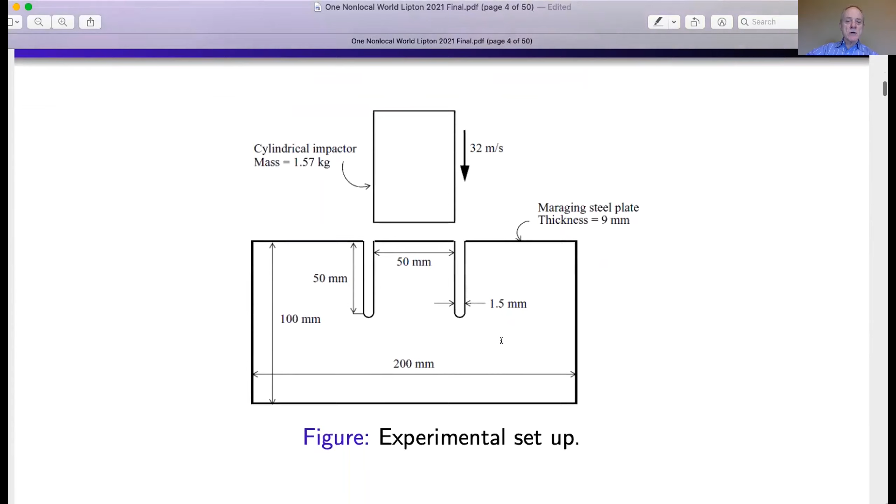Now I want to show you a numerical analysis which exhibits this. We're going to use a peridynamic model similar to the one given, with the force that we'll say is elastic, but if it gets too strong—if the strain between points X and Y gets too big—things may break. We're going to use that force and dynamics, fill a material with it, and impact it with a cylindrical impactor coming down at 32 meters per second.

It's going to hit a ligament, with air on both sides. Here we have zero displacement boundary conditions, fixing it; here it's zero traction, and here it's zero traction as well. We're going to impact this material, with forces and acceleration governed by an equation of this form. We'll see what happens.

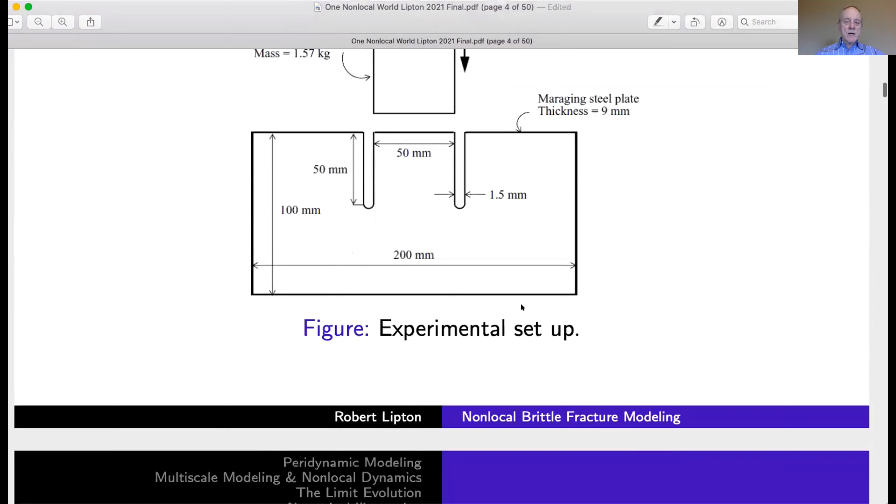What happens is the impactor strikes the sample. These are held displaced—fixed displacements, so they stay the same. But this thing shifts and cracks. These are intact here, intact here—this material is intact here, but we have a crack.

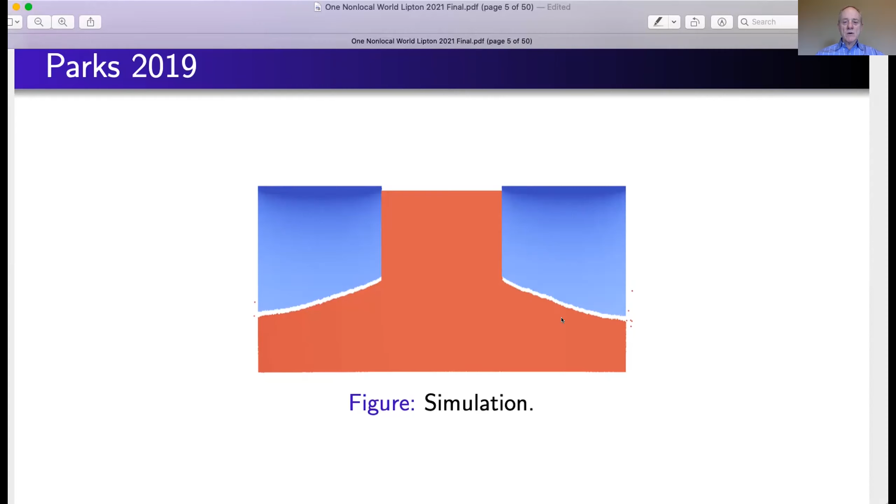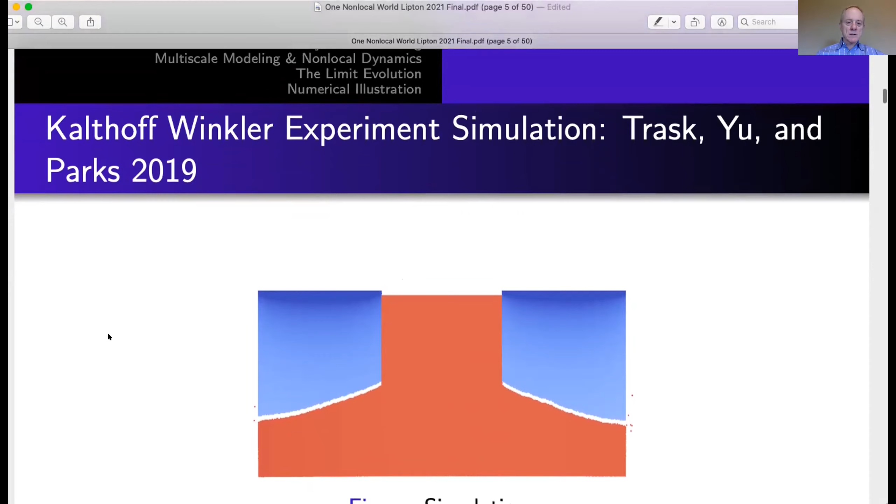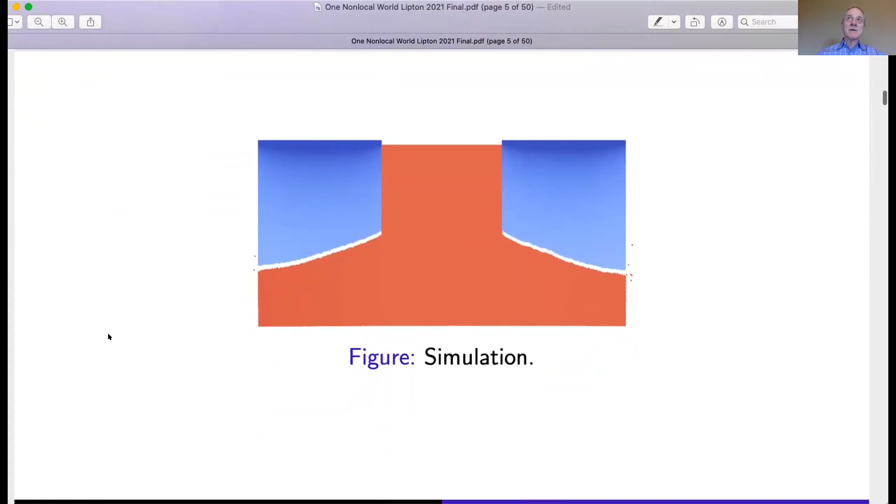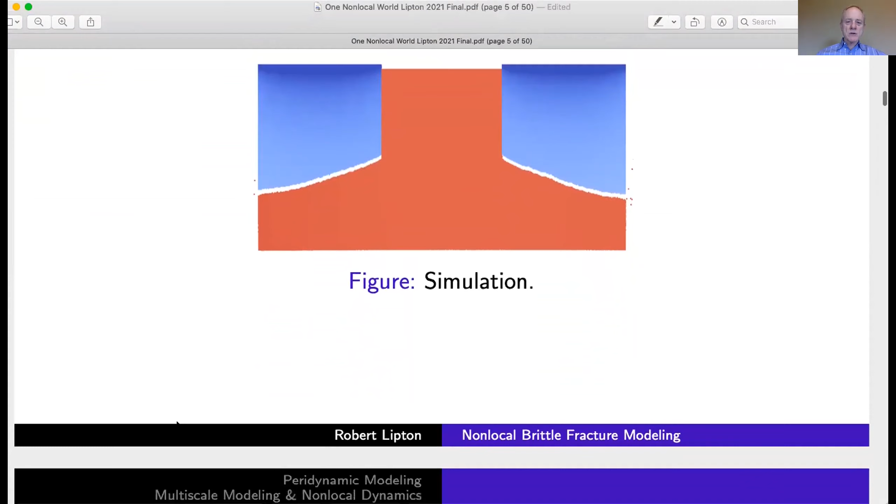This is a numerical simulation by Nathaniel Trask, Yu, and Michael Parks, in their 2019 article in Computer Methods in Applied Mechanics and Engineering. From that dynamics emerges this fracture, symmetric on both sides. What they find is that the angle the fracture makes with the vertical is 68 degrees, in agreement with experiment.

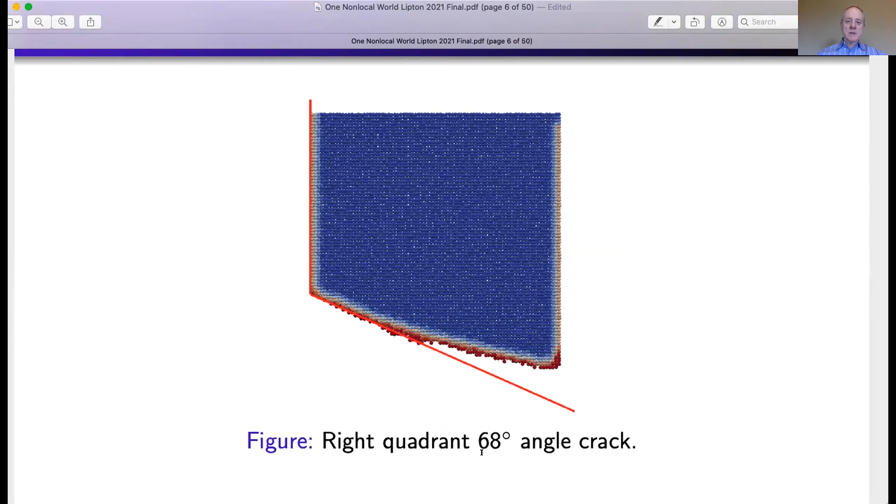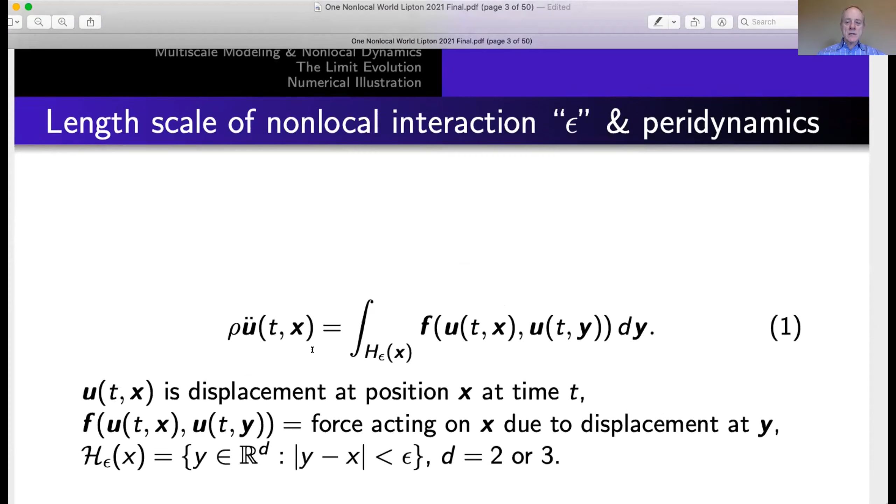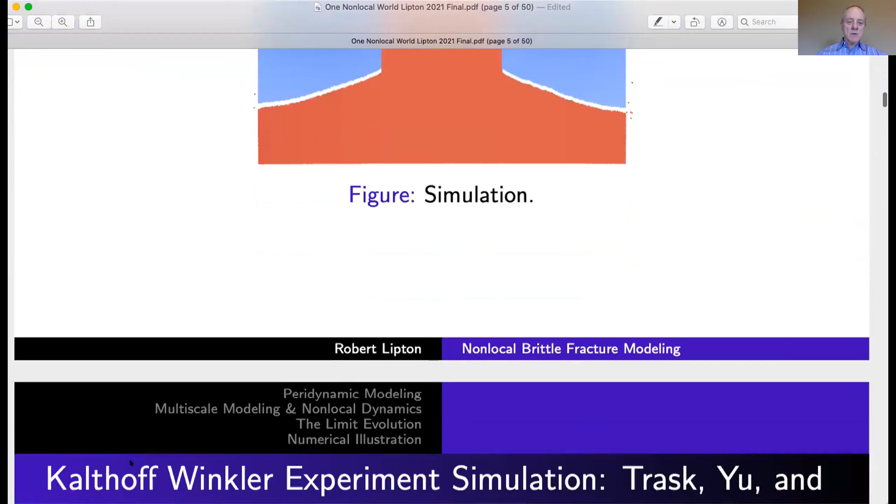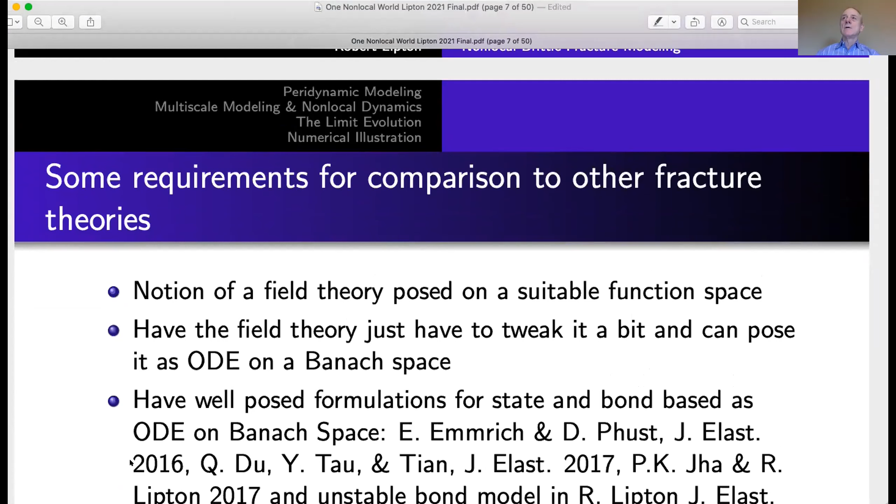Now, that is an emergent phenomenon because that 68-degree angle was not part of the dynamic formulation. It emerged from the model. And so that's what we mean by a field theory, and it's very compelling. So we have an emerging fracture emerging from a simulation. This is similar in spirit, at least, to Cucker-Smale and the emergence of flocking due to nearest neighbor interactions.

In this lecture, what we want to do is compare the peridynamic fracture model to other fracture models to see how they relate to each other. We're going to take the length scale, here it would be the horizon of interaction, and ask that the horizon becomes smaller and smaller. So we're going to look at the length scale of vanishing horizon and its effect on the dynamics.

And what we will do is write down the equations associated with that dynamics, and then using the equations alone and no hypotheses, we'll send the horizon to zero and see what the limit dynamics is. So that's the idea here.

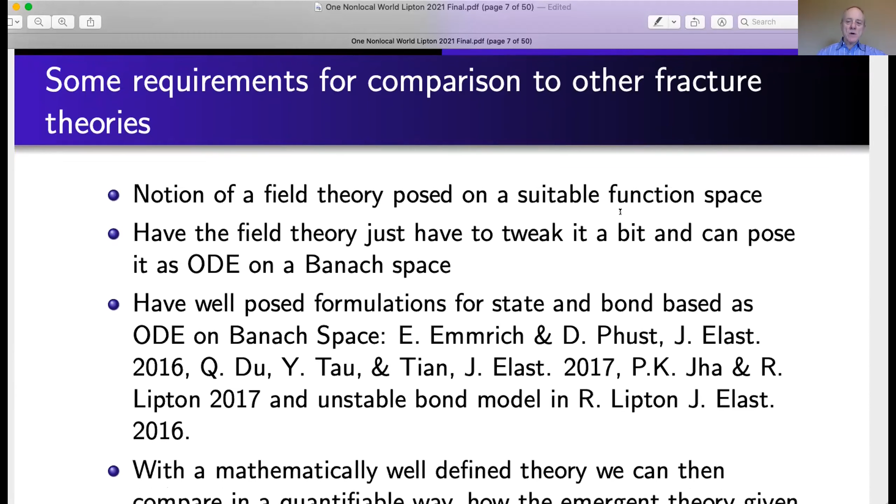So in order to do that, we have to have our field theory posed on a suitable function space. That suitable function space should allow for fractures, as well as the force. And it's nice because the functional analysis is quite simple, and we can pose peridynamics as an ordinary differential equation. The time derivatives are the only derivatives here, on a Banach space. The right-hand side, the force, could be complicated, but in principle it's an ODE on a Banach space.

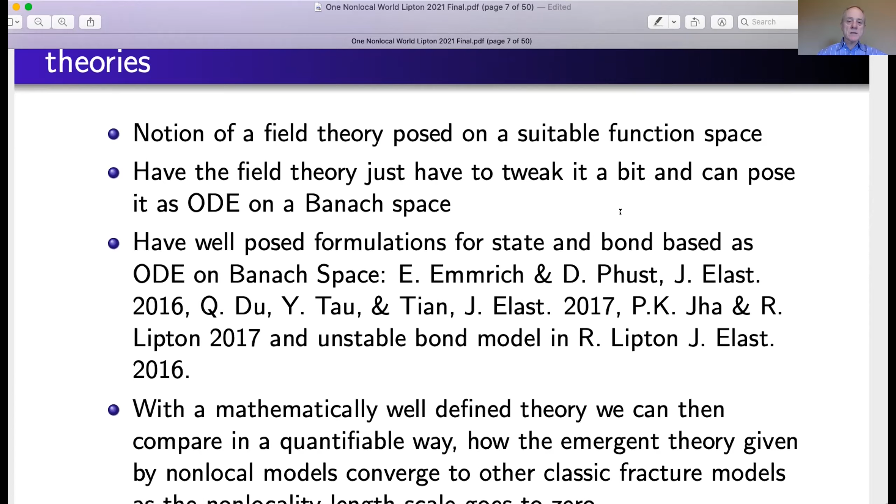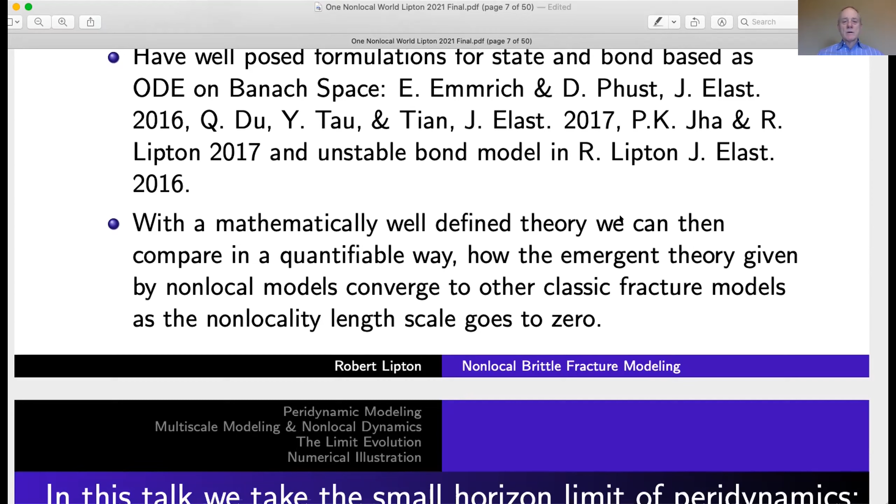Lipschitz continuous on that Banach space, and we have well-posed formulations for state and bond-based ODEs, notably Etienne Emmrich and Dimitri Puhst posed for a certain type of damage and showed well-posedness. And then Du, Tao, and Tian, in Journal of Elasticity, for a different type of damage model, showed existence. And then more recently, we used the model of Emmrich and Puhst to do some state-based existence. And then there are some other earlier ones showing well-posedness of the ODE in a Banach space for an unstable bond model.

Well, anyway, with this mathematically well-defined theory, we can compare in a quantifiable way how the emergent theory given by non-local models converges to other classic fracture models as the non-locality length scale goes to zero. So in this talk, we'll take the small horizon limit of peridynamics, a certain model, and I'm going to explain that model in the next slide.

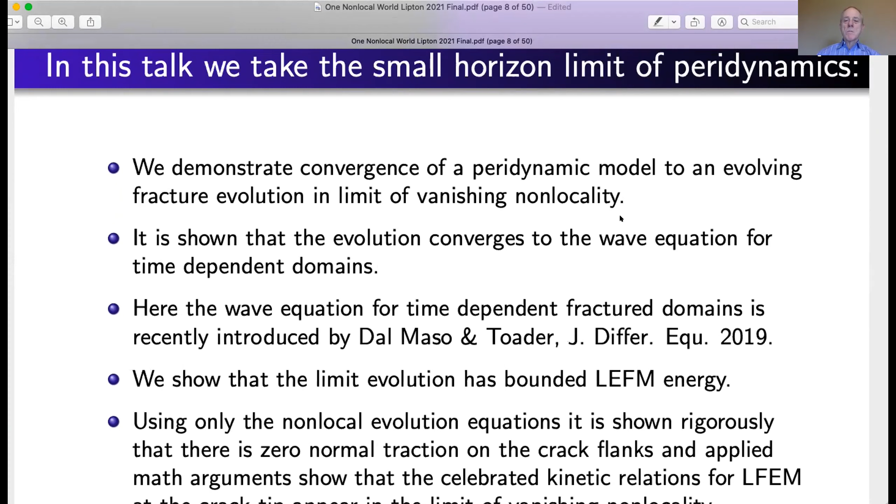But to summarize and give an overview: in the small horizon limit we'll demonstrate convergence to a limiting model in the limit of vanishing non-locality, which will involve an evolving fracture set.

We will show that the evolution converges to the wave equation for time-dependent domains. This wave equation for time-dependent fractured domains is the one recently introduced by Dal Maso and Toader in the Journal of Differential Equations. So peridynamics, taking the limit, actually makes contact with this notion of time-dependent fracture domains, for sharp interface, well, actually just time-dependent fracture domains, period.

We show along the way that the limit evolution itself has bounded linear elastic fracture mechanics energy, just using the non-local evolution equations and integration by parts and taking limits. We can show that on the crack flanks, this growing crack, we have zero normal traction, which is consistent with our understanding of linear elastic fracture mechanics and what happens on the sides of cracks.

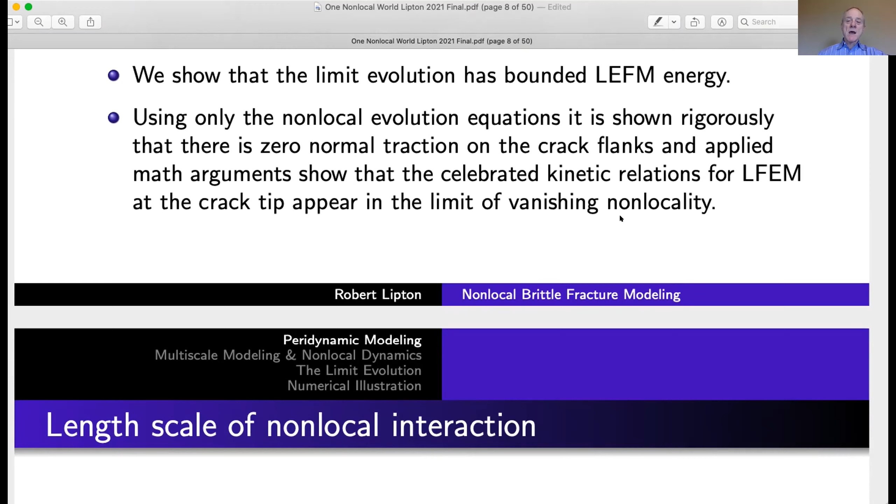And applied math arguments show that the crack tip kinetics, that is the rule for how a crack tip should move, is given by linear elastic fracture mechanics, provided that the crack velocity is not too high, because that's where linear elastic fracture mechanics works. If you go higher than that, you can hit instability, and then your crack can bifurcate. So we'll just look at stable crack growth, and that's where linear elastic fracture mechanics applies.

And we see that peridynamics, as the horizon goes to zero, already has inside it, in its constitutive laws, the kinetic relations for linear elastic fracture mechanics, which is somewhat surprising, but they just pop out.

So let me just review very quickly the non-local model as we're going to use it. We have a ball, which we call H of epsilon. Epsilon is the radius of the ball.

So it's of length epsilon, the radius of the ball. The ball is centered at the point X, has radius epsilon, and other points within the ball are denoted by Y.

Basically, interaction between the points Y and X only happens inside this ball. If the point Y is outside, it doesn't exert any force on X. Otherwise, if it's inside the ball, it will exert a force on X. Now I'll explain what those forces could be.

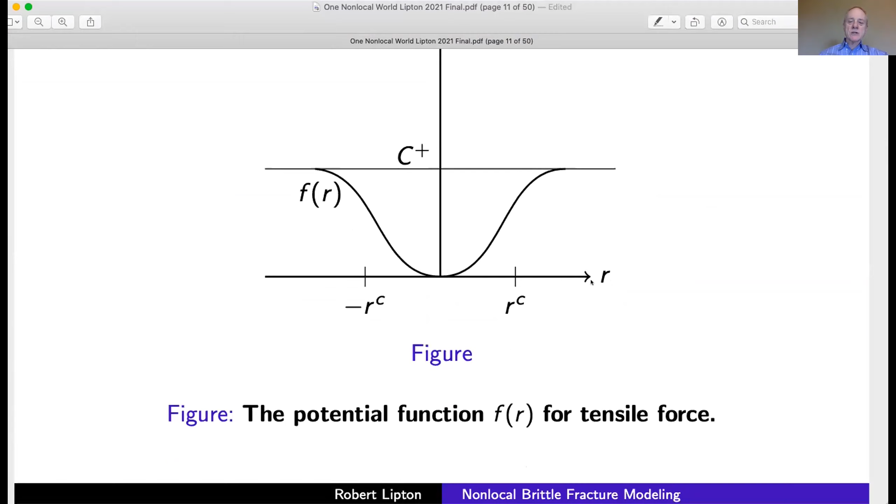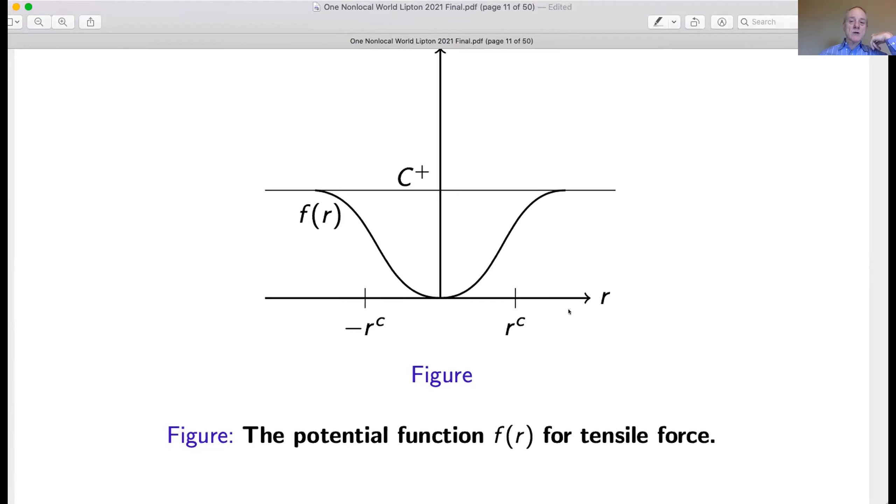Then we're going to have a force potential that exists. The abscissa here, R, is the strain, and the ordinate is the force, or the force potential. This is a particular simple potential, and we could take something that looks more Lennard-Jones-like as well, but I'll fix ideas and look at this potential.

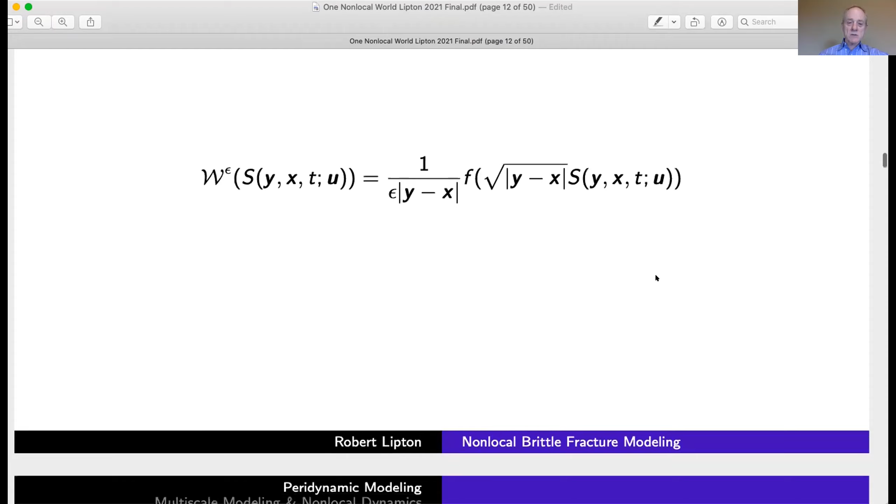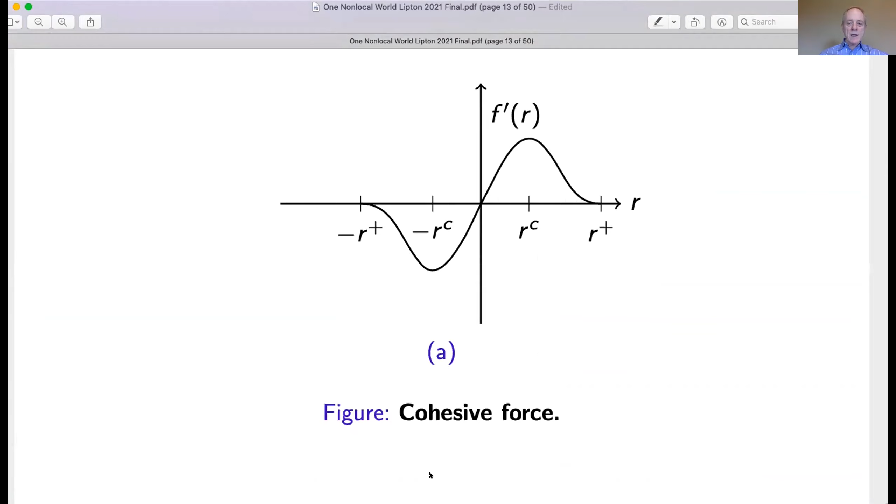This is the constitutive law of the model. If I take the derivative of the force potential, I'll get my force acting between two points X and Y. It increases initially with strain, and then at some critical value it starts to soften, and then softens to zero—likewise under compression. Now, we could make this such that it doesn't go down like this; it could go way down and resist compression a lot more than it does strain. But to fix ideas, I've left it like this.

So then our force on X due to a deformation U at time T is simply the sum of all the forces, summed over all Y's for Y inside the ball centered at X, and let us also say that X has to be in some domain. So we're going to look at a finite-sized body. The body itself will be called D. It could be in 2 or 3 dimensions.

It'll be connected, finite size. For right now we can assume it's smooth on the boundary, but it doesn't have to be convex. We can make it more bizarre if we want, but let's take a nice smooth body. So as long as X is in the body, then we have some force. As we get close to D, our force will be affected by the fact that D is there, but it should be.

So the dynamics on the domain—here's the domain. The dynamics is again the acceleration at point X at time T multiplied by the density. Here we'll assume the density is the same for every X in the domain, and this is equal to the peridynamic force, the non-local force, plus a body force. Our body force here is local, at each X in the domain, and it may change with time, but it's prescribed.

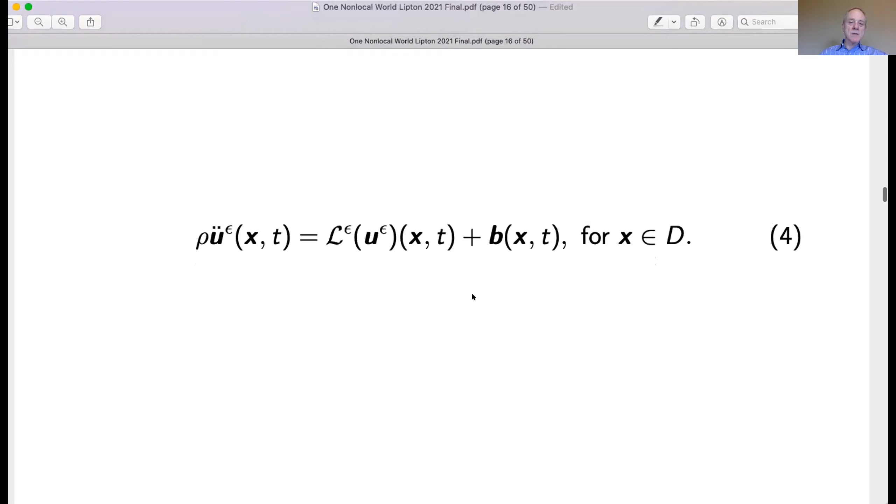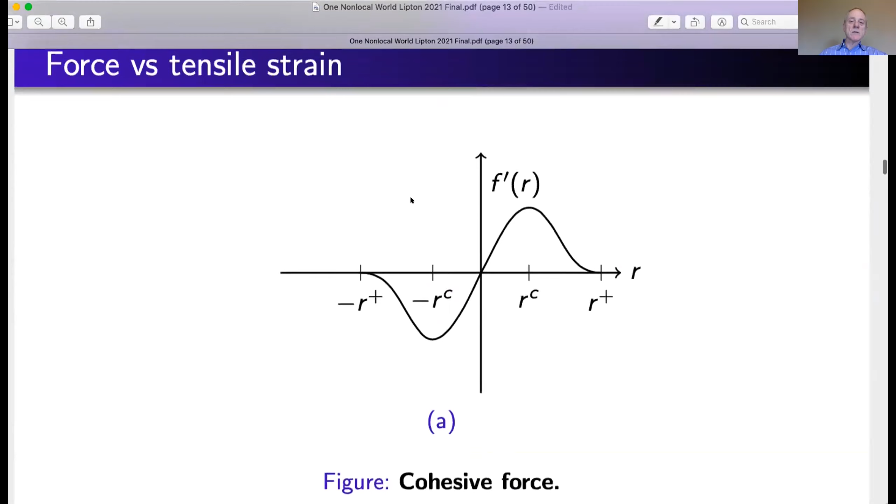So the body force is prescribed. We're considering basically a Neumann problem here, so that's why the boundary conditions are not prescribed. Just to note, one thing is that rigid rotations—we do not consider rigid rotations, so we mod those out. The reason is because this strain for rigid rotation lies in the kernel of the strain.

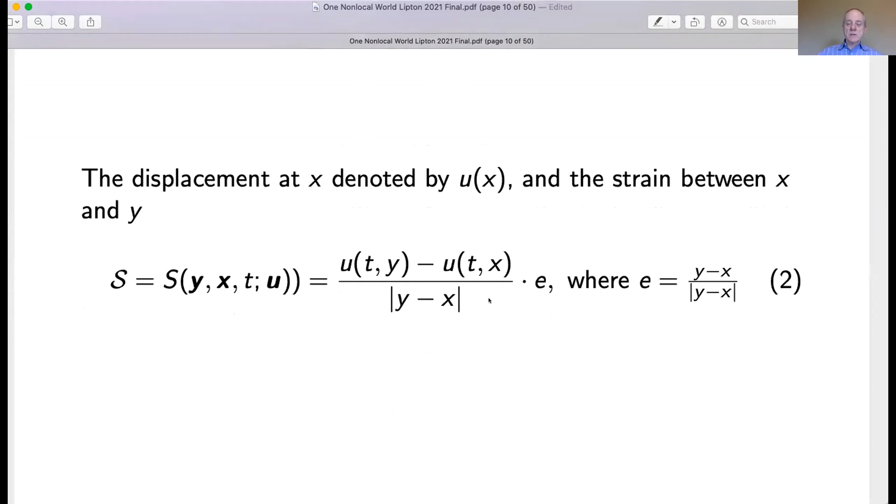So it's a pure Neumann problem. We're going to think of the layer of body force along the boundary of it.

Now what I wanted to show you is what is called a failure zone. We don't have a crack in a peridynamic model, but what we can do is prescribe a failure zone. So to fix ideas, suppose we have a failure zone center line.

So there's some line in which there's going to be failure. The idea is that you have a point X in this figure, and for Y's above this failure zone center line, Y and X do not interact. That is, it's on the softening part that's already softened to 0, for any pair of points X and Y that lie across the failure zone.

And inside this horizon, that's what we call a failure zone. The failure zone is the union of all centroids of these balls such that bonds on the other side of this line have force between two points equal to 0.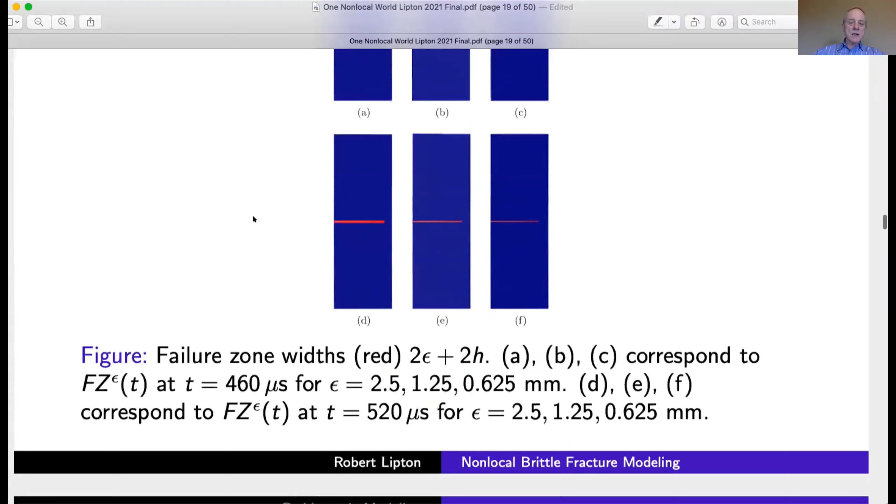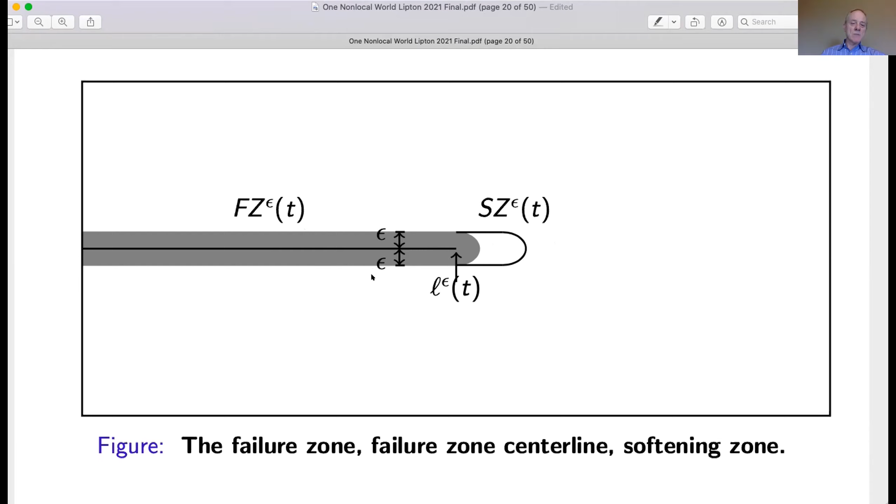But as soon as the crack moves, so imagine you wait a minute and the crack moves and now you're here, now you're softening. Once you've crossed over here, you've failed. So this is the failure zone, sort of a smeared out crack. It actually has dimensions, epsilon below and epsilon above the crack.

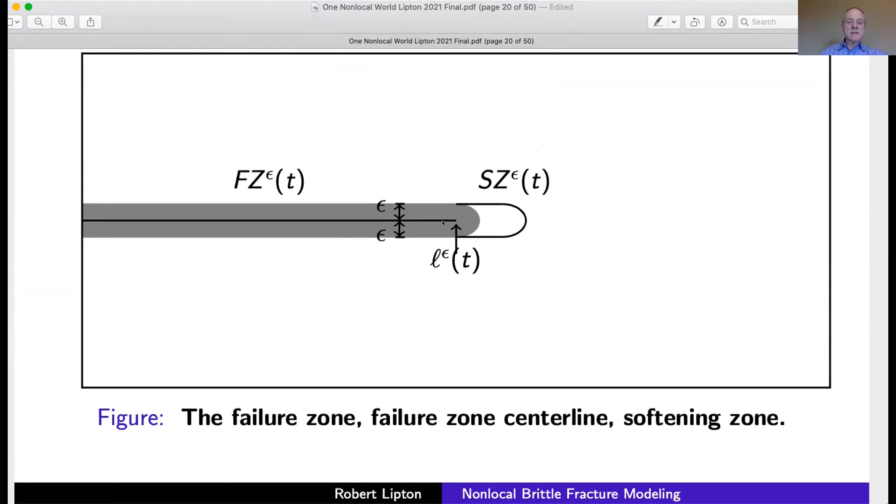Now the question is, in order to do all that, you had to exert some work, it required energy to soften the bonds. So can we do a back of the envelope calculation to see how much energy it required per unit length of this center line to soften bonds on either side of this failure zone? How much work is involved given the equations of motion, because that's all we can use to calculate?

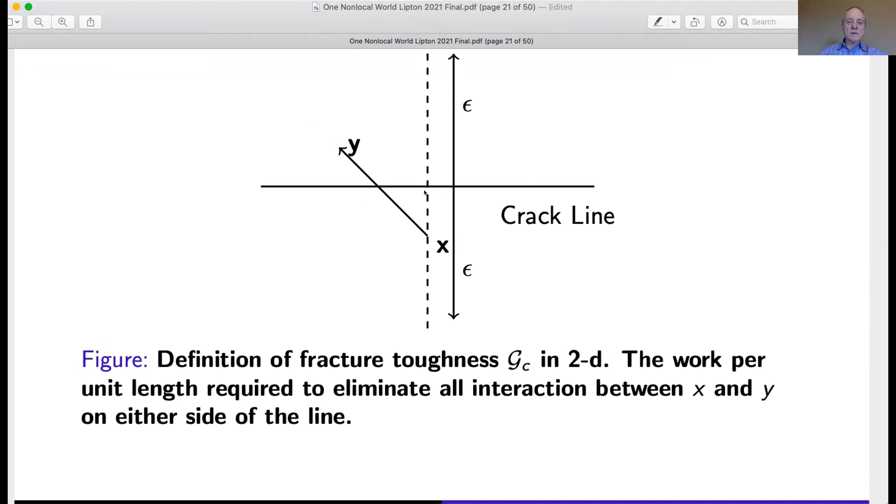We can define a fracture toughness, which has been defined by many authors, and we follow that approach, where you have a point X here and another point Y here. They lie across the failure zone. The idea is how much work do I have to expend in order to fail a bond between here and here? Then I want to add up all the bonds that are going to fail as I take X epsilon away from this center line. So we want to add up all the bonds.

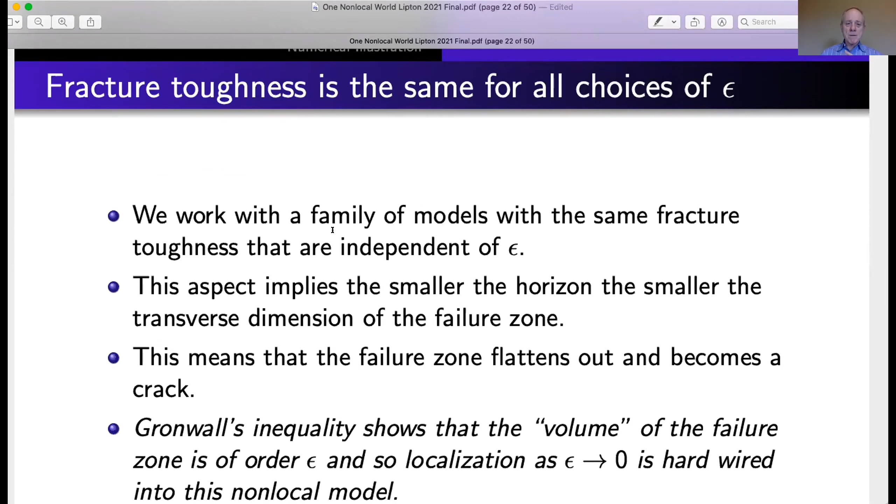One thing I wanted to say is that scaling, remember I divided by epsilon and did some tricky stuff when I defined the potential, and the idea is that for this model, the fracture toughness is the same for all choices of horizon. So we're working with a family of models with the same fracture toughness, and it will turn out through direct calculation that the fracture toughness is independent of epsilon.

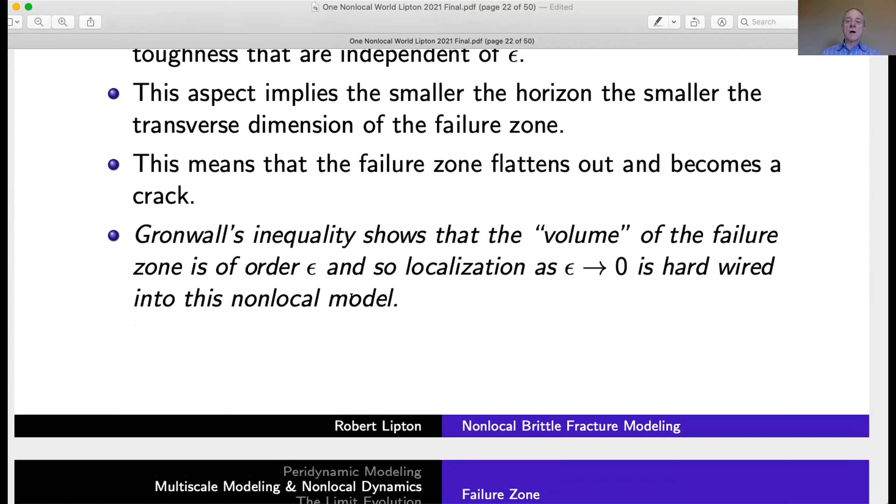What this implies is the smaller the horizon, the smaller the transverse dimension of the failure zone. This means the failure zone flattens out and becomes a crack in the limit of epsilon going to 0. In fact, Gronwall's inequality applied to the equations of motion shows that the volume of the failure zone is of order epsilon. So localization is actually hardwired into this model without doing anything, just a back of the envelope Gronwall inequality will show you this.

Now we go to the formula. So we calculate the amount of work or power required to fail all these bonds in this cap, and then run X here.

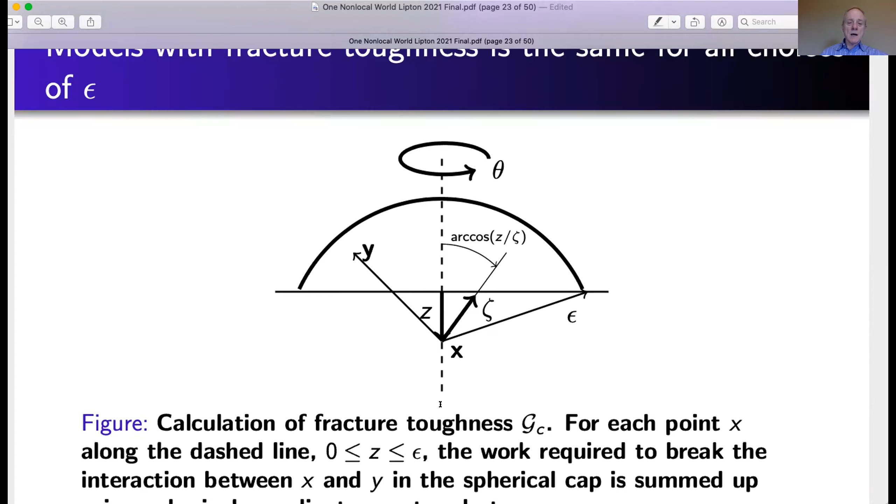This X point starts at the failure zone, we run it to epsilon, integrate, and find out the power required. This was done originally by Silling and Ebrahim Askari for a different model, but it's always the same no matter what peridynamic model you use - that's where I found it first, and it's a beautiful calculation. You can apply our model here, and you get that the fracture toughness from this formula does not depend on epsilon.

It's the same for all epsilons, hence the scaling. Now what about elastic coefficients? Can we relate elastic coefficients, when the bonds are in the linear regime, to classic elastic coefficients? The answer is yes. All we need to do is expand the peridynamic energy in a Taylor series, and we immediately get that to leading order the peridynamic energy.

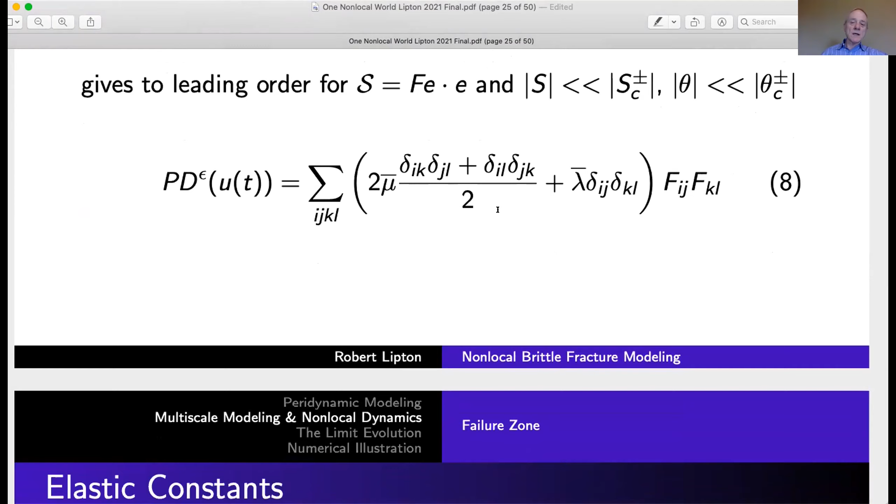Here we're taking the integral around the horizon everywhere, and what we do is look for a linear strain resolved along direction X, epsilon, summed over all Y's in the neighborhood. We get a limiting form where the peridynamic energy looks, to leading order, like linear elasticity, where the Lame moduli are given here. The shear modulus is given by a formula in 3 dimensions, and the Lame moduli is also given by a formula - they're the same here because we were looking at bond-based peridynamics.

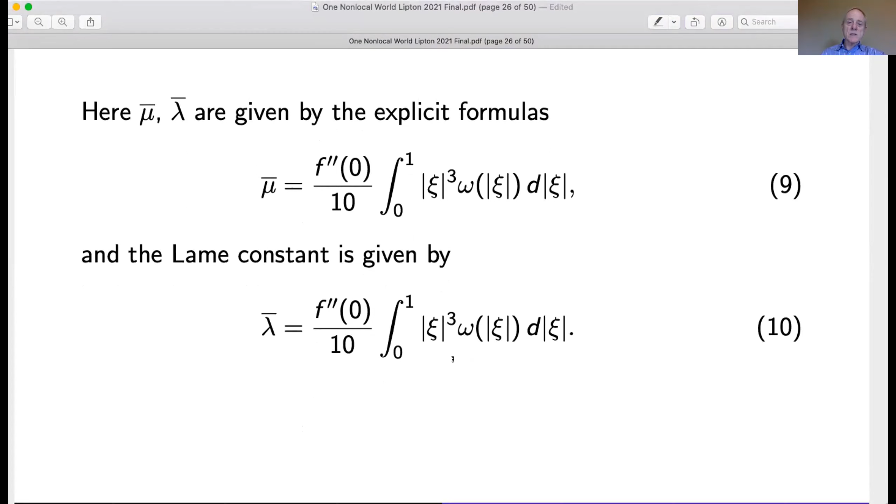But it's enough to just start with this, and also we can do it in 2 dimensions. Now, what do we want to do?

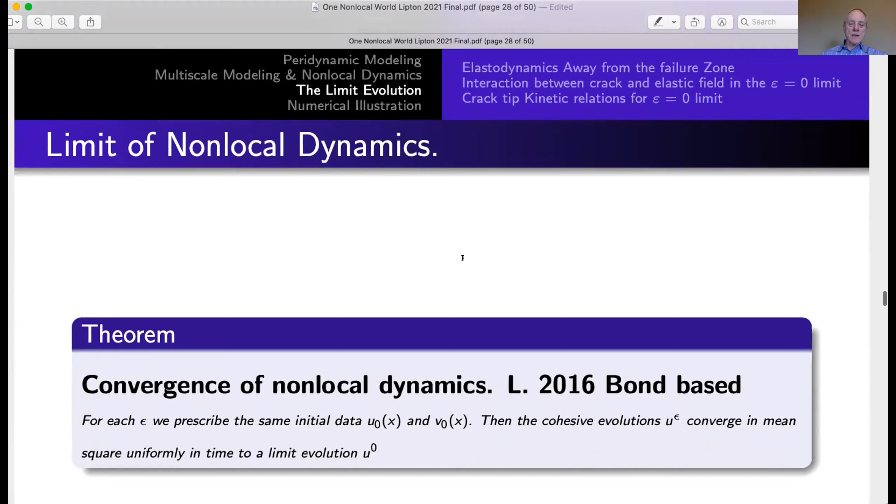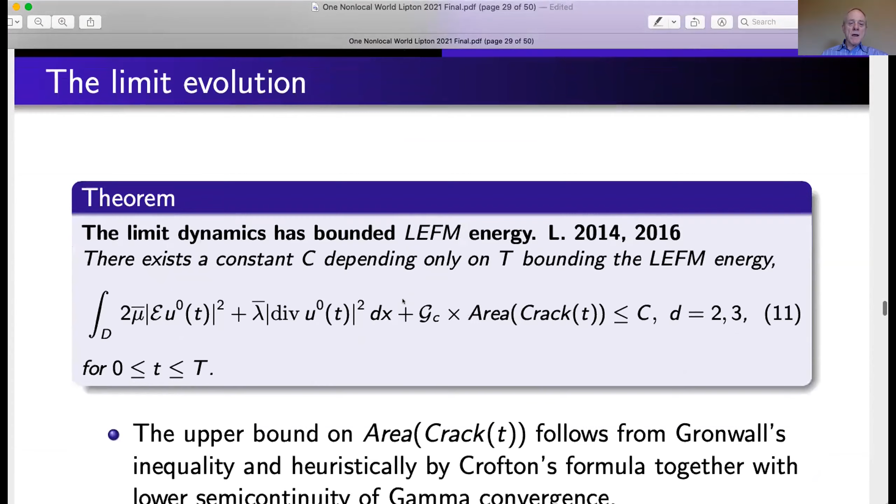For our model, we want to approach a local fracture model in the limit of vanishing non-locality. So we can consider a sequence of solutions associated with a sequence of horizons and follow their dynamics. We get convergence of this non-local dynamics, provided we have the same initial data - then the evolutions converge in mean square, uniformly over a time interval, to a limit evolution.

This limiting evolution actually has bounded linear elastic fracture mechanics energy, and this is true no matter what the crack set happens to be. This is what you get: this is the elastic part of the energy, and this is the surface energy here - this is the fracture toughness. Notice this is the same fracture toughness we calculated using the formula before. This inequality comes from Gronwall's inequality.

We have to pass to a limit, which we do using gamma limits, and heuristically this area is given by Crofton's formula. It actually follows from the peridynamic potential in the limit, because we could use Crofton's formula - it's a very nice calculation.

Away from the failure zone, in any quiescent region where fracture hasn't occurred, we pass to the limit as epsilon goes to 0. We get a limit evolution, and the limit evolution actually evolves elastodynamically according to the Navier-Lame equations, as long as no fracture passes through there, and we're given that the stress tensor is given by the usual stress tensor for linear elasticity, where these are the coefficients I computed just a second ago.

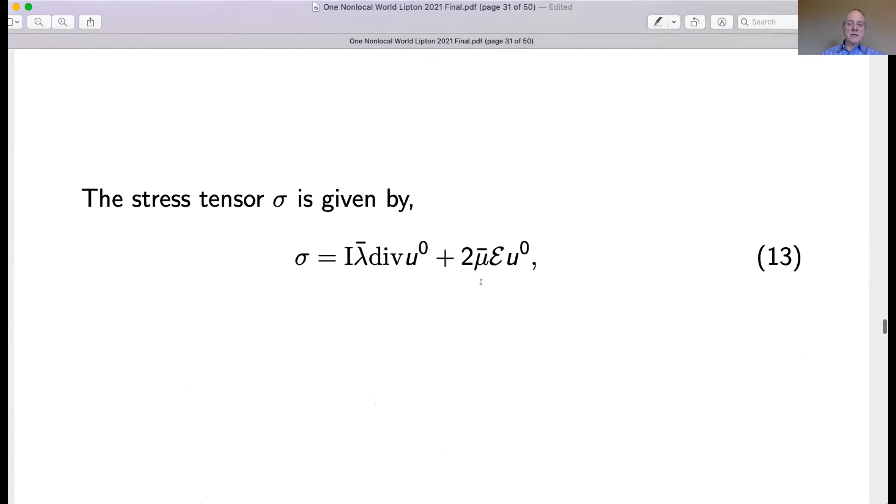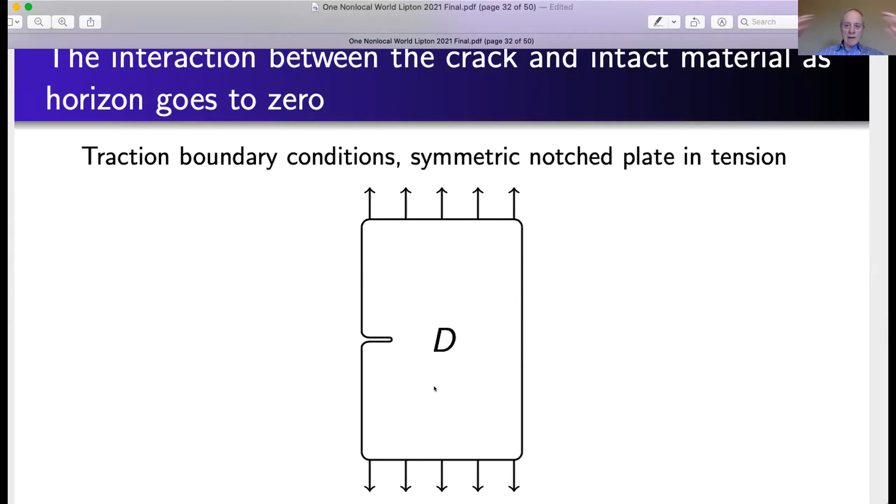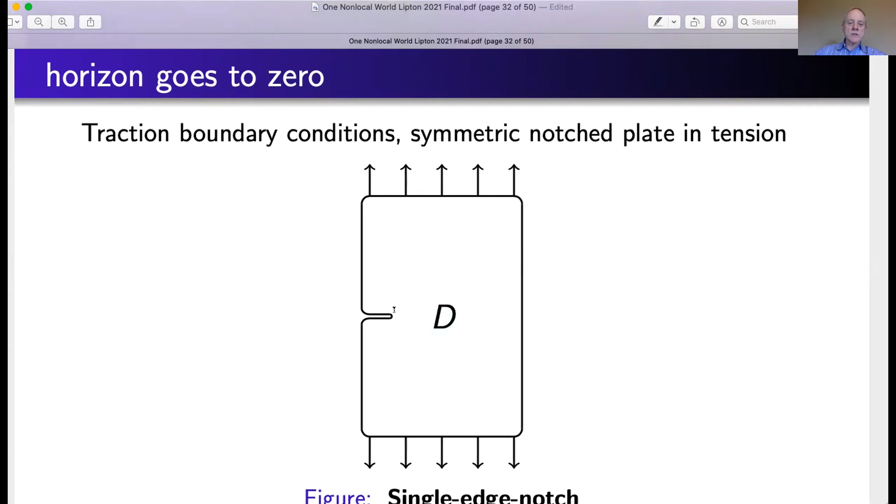Now the question is: wait a minute, suppose the crack does go through - we're not going to look at the quiescent region anymore. We're going to look at regions that contain cracks and intact material. So we apply our traction loading conditions, notch the specimen, and grow a crack from the notch to the right. Since we're pulling symmetrically, the crack will stay along the x2 equals 0 axis - vertical axis is x2, horizontal is x1.

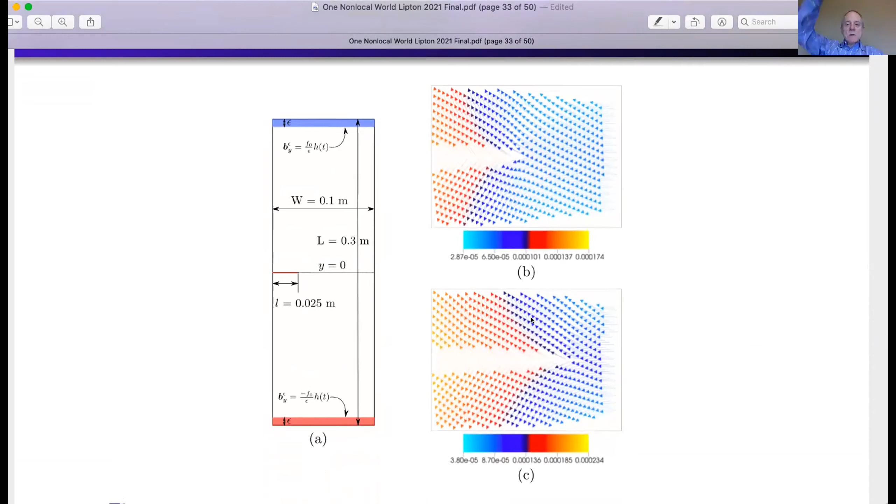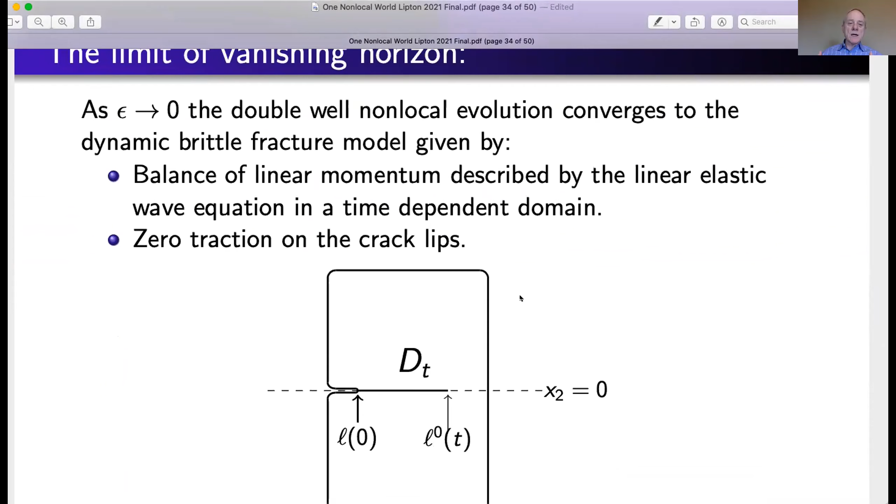If we do it numerically, we see it right away: when we pull, we get a crack propagating from the notch, moving inward, moving to the right. What happens in the limit of vanishing horizon? As epsilon goes to 0, we get an epsilon equals 0 solution - a balance of linear momentum described by the linear elastic wave equation in a time-dependent domain, with 0 traction on the crack lips. Here, Dt is the time-dependent domain, and the boundary of Dt is the sides, the notch, the top and bottom, as well as this new piece of boundary evolving with time - that's the crack.

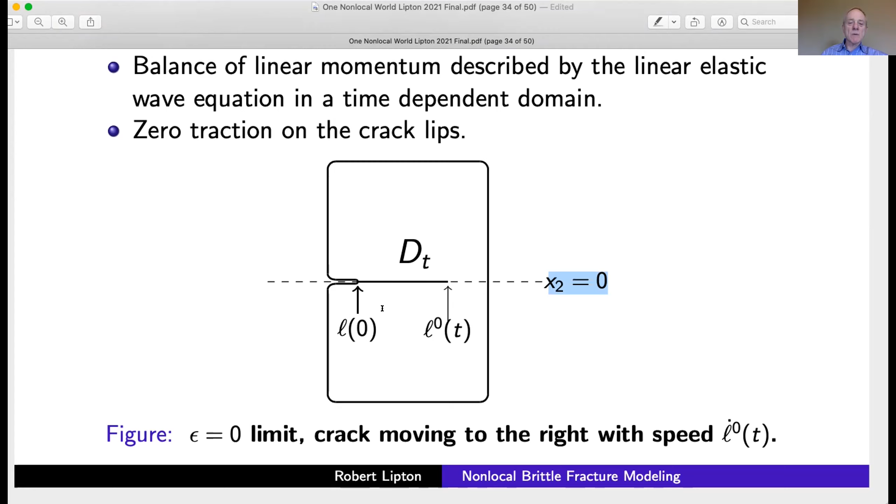Okay, this new piece of boundary is evolving with time, growing, and outside it we solve the elastic equations. On the crack faces, if you take the trace coming from below, you get zero normal traction. If you take the trace coming from above, you get zero normal traction.

Okay, what are the properties? Again, the properties of the limit deformation is, well, for a crack, that's gamma t. That's going to be on the x2 equals 0 axis, and it's for coordinates between that should be L0 of t, not L0. I mean L0 of 0 when t equals 0. The left end point in this interval is L0 at 0. The right end point is L0 at t.

Okay, and what we find is that u is actually a special function of bounded deformation, such that the regular part of the radon measure, which is the symmetrized strain tensor, is square integrable over D. And the crack, the jump set, is contained inside the fracture set.

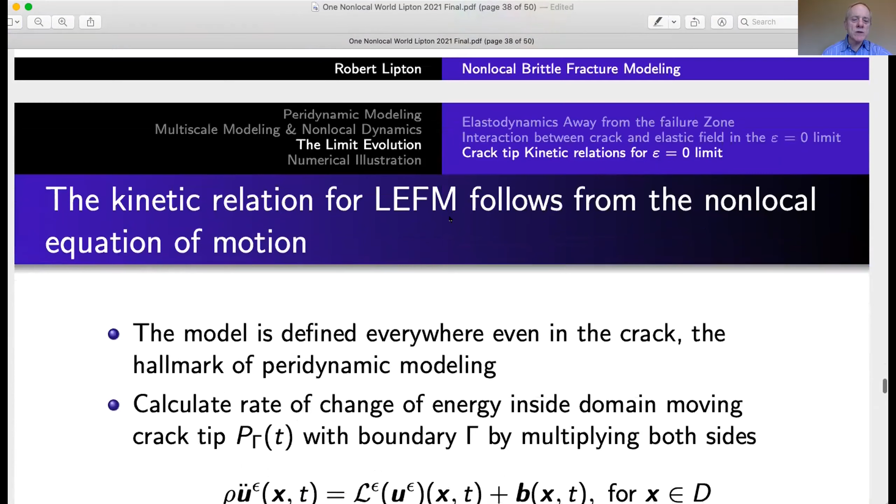And U is actually more regular. It's actually an H1 of Dt. It's zero traction on the crack lips. And now the last question we ask is, well, what's going on at the tip of the crack? Can we, just from these motions here, the dynamics, deduce what's happening on the tip of the crack? And the answer is yes, we can.

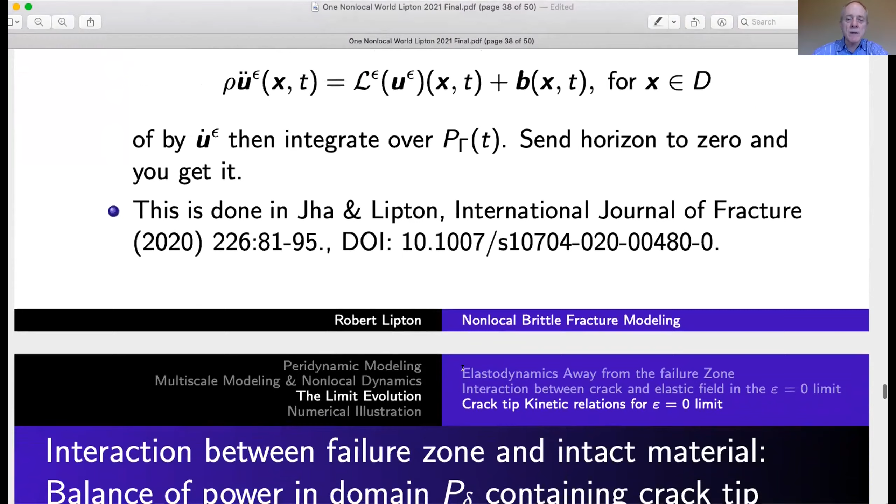This is done in the recent paper in International Journal of Fracture. And what we do is we take a domain that contains the tip of the crack here. This is the actual crack, the fat crack. We contain it, and we contain it.

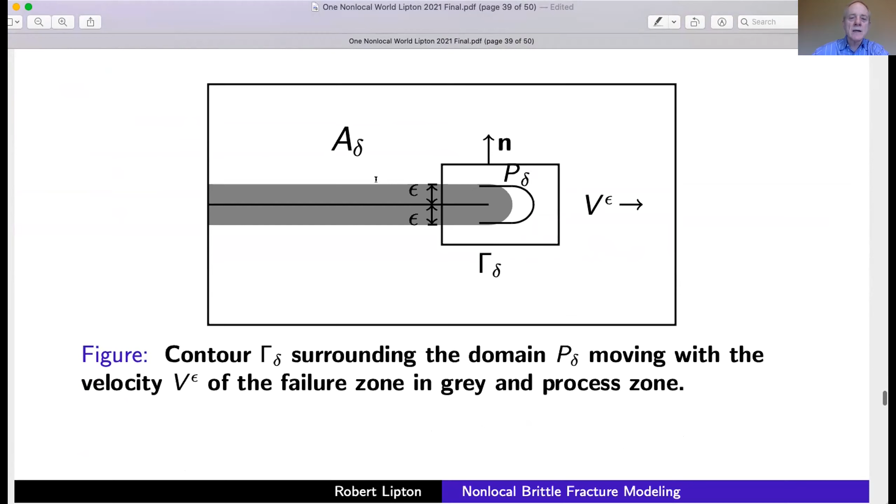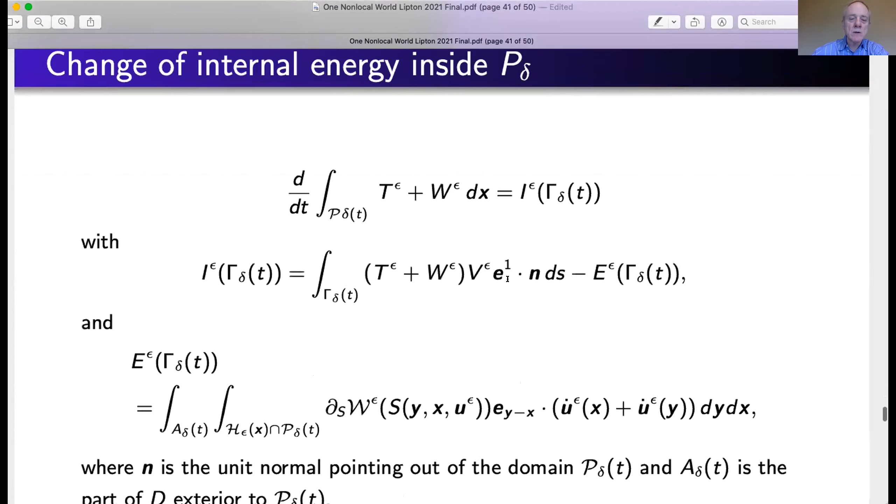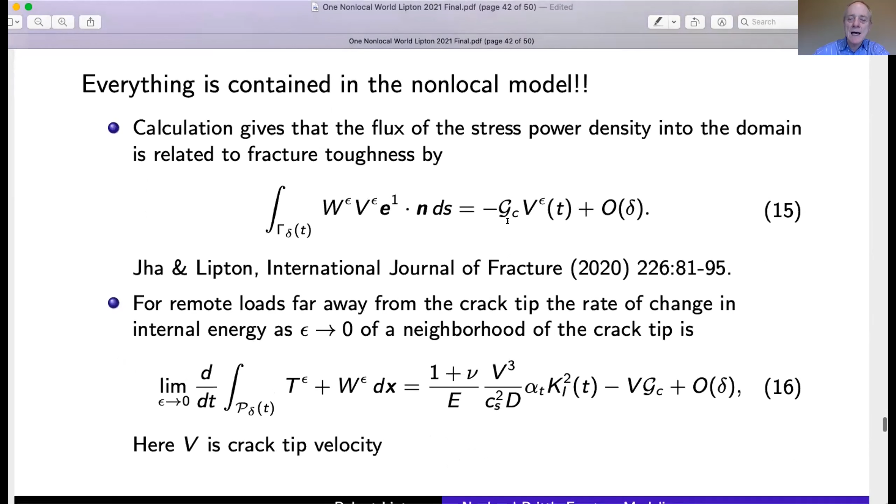We pass to the limit. We take epsilon goes to 0 here in this identity. We pass to the limit, and we get to leading order that the stress power flux is equal to exactly the power required to make interface per unit length.

And we more generally get this identity, which says that the change of internal energy inside, to leading order, there is the stress intensity factor sitting there. Here is the velocity of the crack. Here is the energy release rate. And when we have power balance, that is, the time rate of change is 0 here.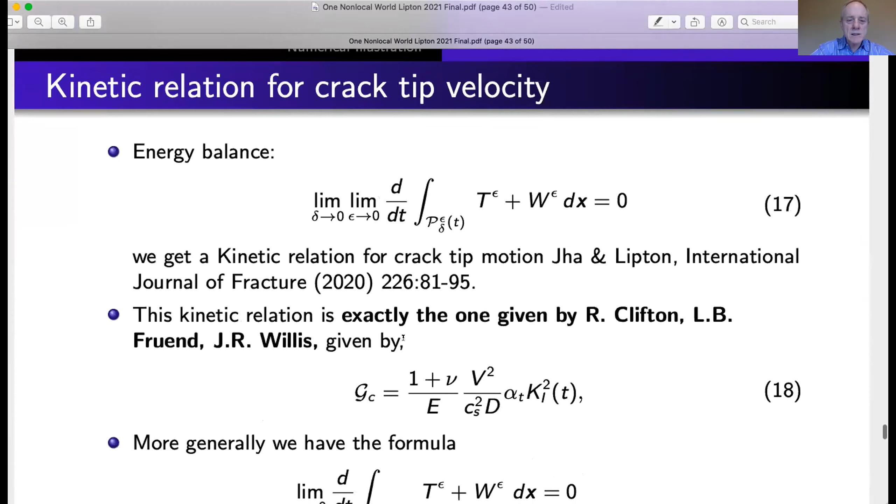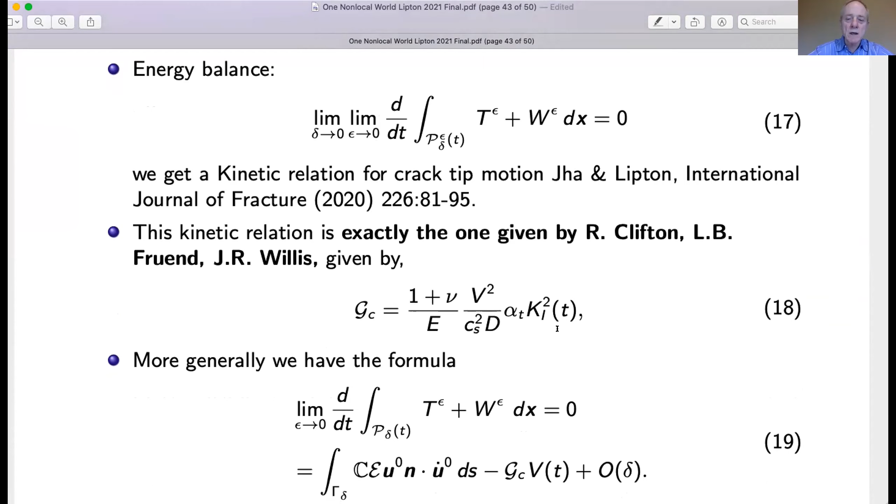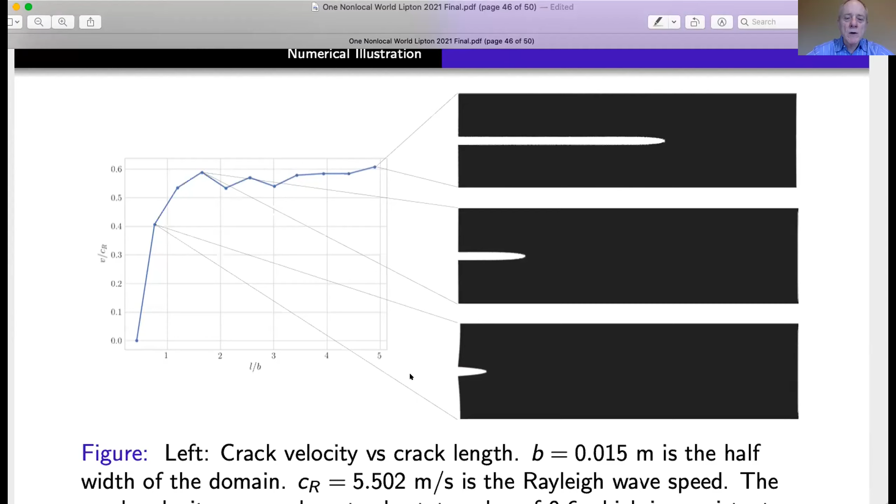All I can say, I'll say one thing. We could do a numerical experiment. Here it is, here's a growing crack. In this region here, we have basically constant crack growth. We're pulling on the upper and lower parts of the domain. We get our growing crack here. We start here, we go faster, we top out, we're at constant speed crack.

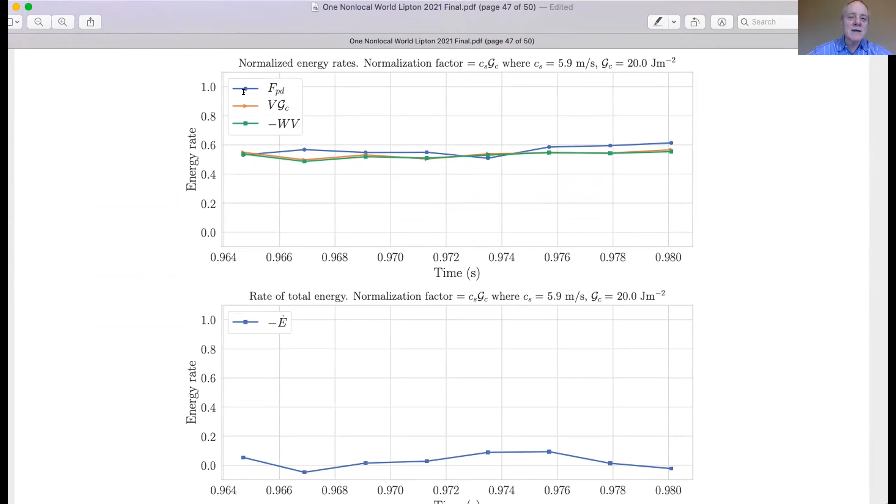And the great thing is we can measure, and this is the last slide, we can measure the orange and green. The green is the power, the stress power, and the orange is the energy release rate. And we have it one-to-one, they match, they're on top of each other. And this is in a numerical simulation, so we see this corroborated numerically.